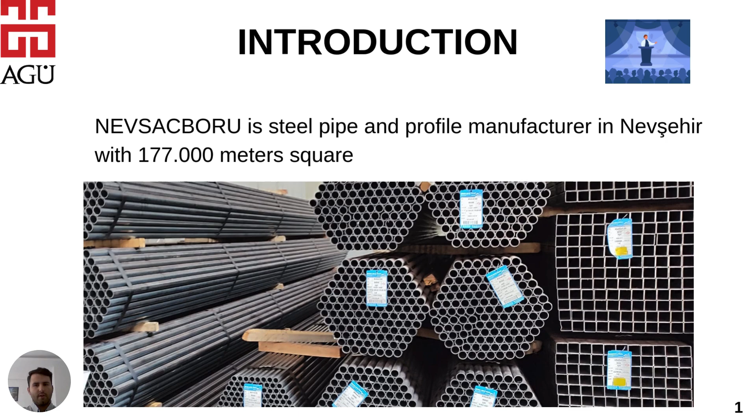Let me go through the system under consideration. Pipes are manufactured within some order, also a decision point. This decision point represents if the selected product will be pipe, steel pipe, or profile.

Supply of raw metal sheet begins the processes and continues to some cutting processes, also welding processes. Also, there is a cooling pool process. And the last process is the shipment, or sending products to the customers.

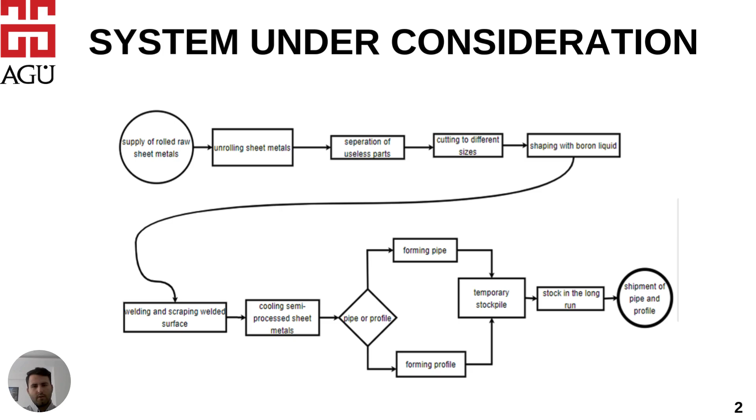The most important system processes are the unrolling and cutting machine, welding machine, and cooling pool processes. Especially the welding machine, because the welding machine represents the sizes of the steel pipes and profiles.

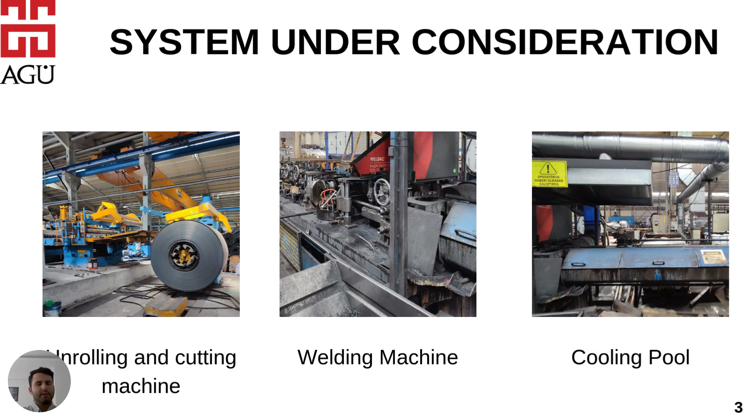Let me go through the methodology part. In methodology, I analyzed the problem in Nevsac Steel Company by drawing a fishbone diagram, considering measurement, people, and environment.

Most problems are coming from the hygiene, also some old gauge use. Also, there are some engineering issues.

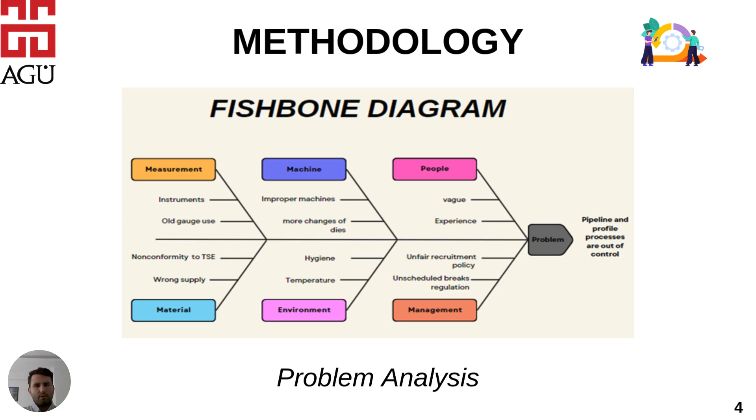These parts represent the old data of profile with size 30 by 30, and this data is related to the thickness of this profile. I have collected a sample size of 10 and number of samples was 25.

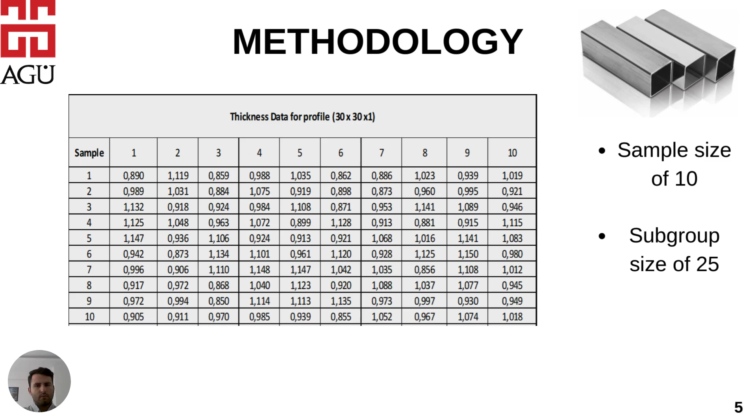Then statistically I illustrated the X-bar chart because there is a thickness measurement. X-bar chart and S chart would be available for it, due to the sample size and the measurement type, which is thickness. As you can see from this graph, there's one assignable cause, an upper control limit, as well as the upper specified limit.

The specified limit, by the way, also comes from the TSE, which is the Turkish standard. Also, there are more fluctuations, wave-like shapes, more and more.

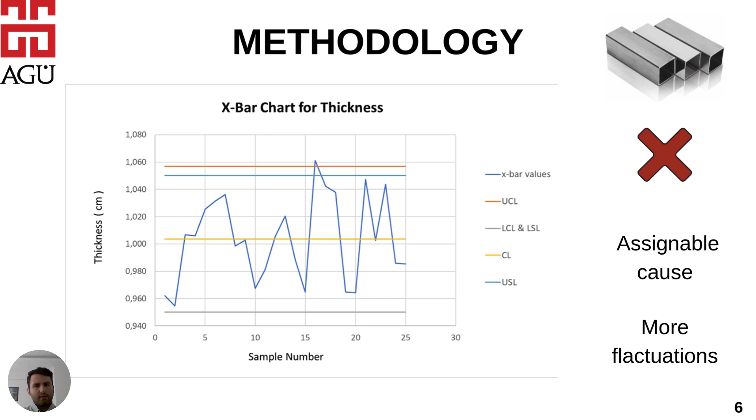Let me go through the S chart. In the S chart, there is no point out of the boundaries, the upper control limit as well as lower control limit. Deviations are too much, and downside deviations are much longer than the upper side deviations. Also, most deviations are at the 16th sample.

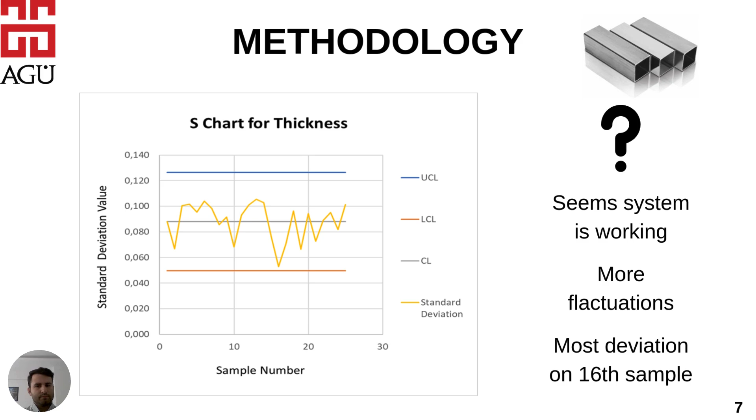How can I improve this system about the thickness? I suggested increased hygiene, new gauge order, and more maintenance for machines, especially the welding machine.

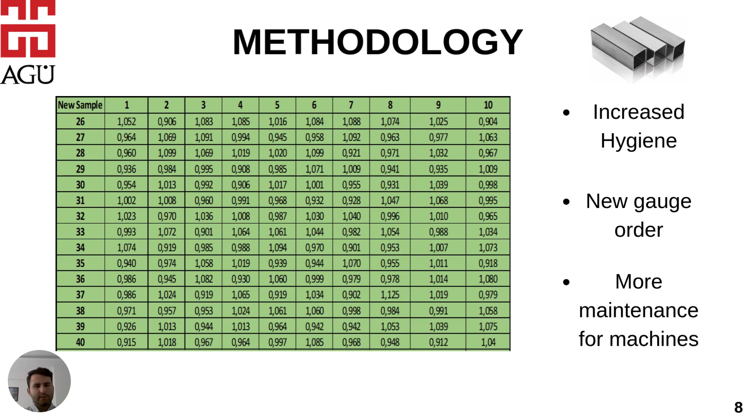For this new data, I took 15 samples in subgroups, and each subgroup contains a sample size of 10. When I increased the hygiene, new gauge order, and more maintenance for machines, the system will be improved. We'll see.

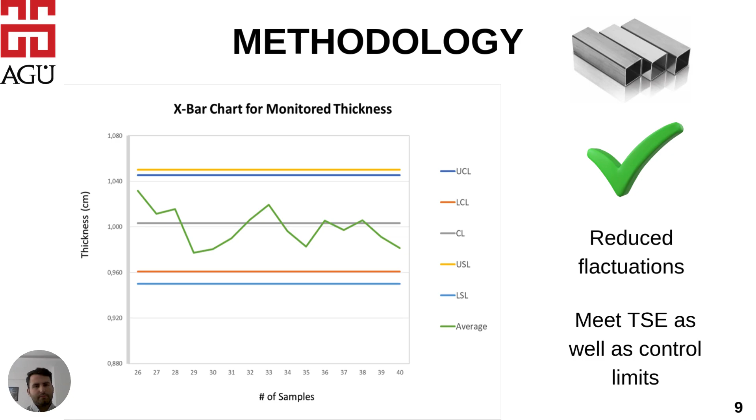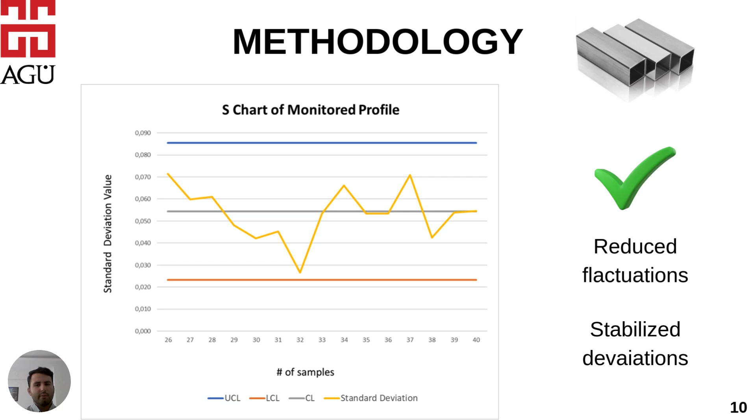Other than profiles, I will be talking about steel pipe with size 20 by 20.

I implemented the same methods like the predecessor one, which is profile. Still, this method is applicable for steel pipe as well. We can see from the data and the chart I will illustrate later.

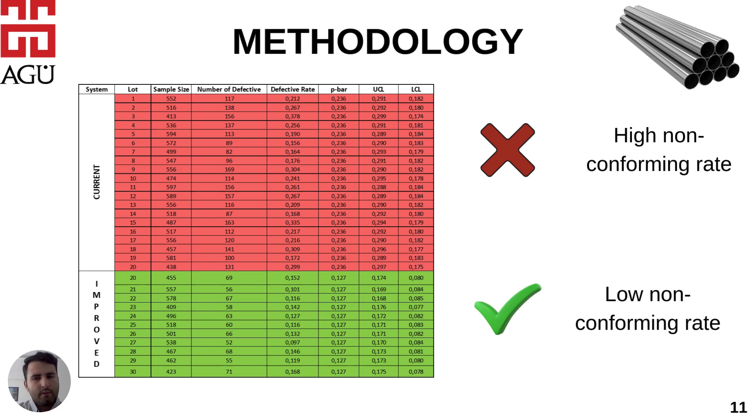After improving the system, the average of P, average of nonconformities, are reduced greatly. Also, the upper and lower control limits have reduced almost 50%.

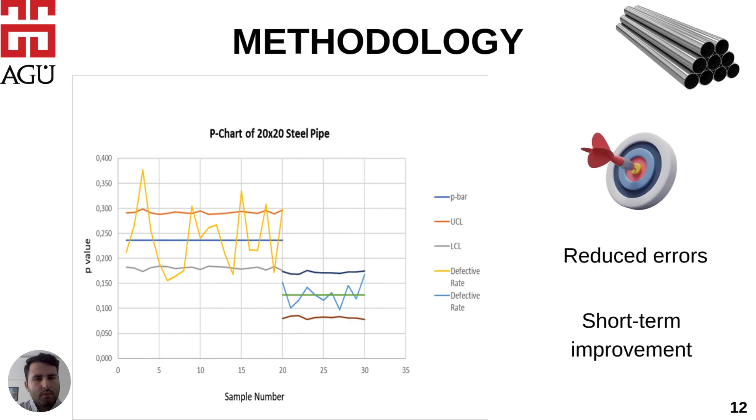As a conclusion, I analyzed the profile with size 30 by 30 and thickness 1 centimeter via X-bar and S chart, because of the sample size and available data.

For steel pipe, I got support from the mechanical engineers. They are also responsible for quality control in the company. Also, I suggested they observe the system over a long duration, because this is a short term solution.

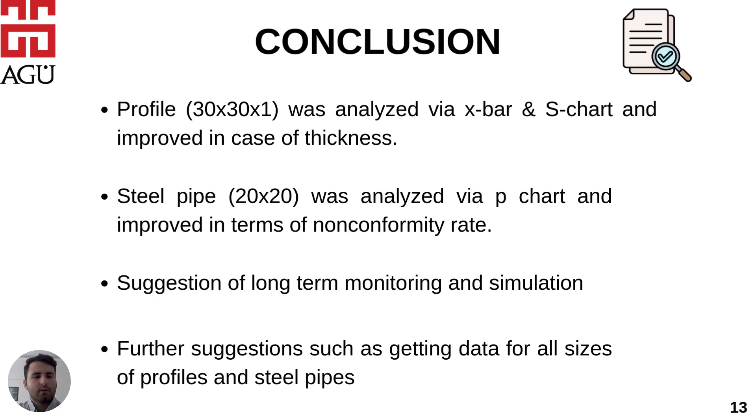We cannot say our solution will be okay for the long term. Also, I suggested they get data from the steel pipe related to their parameters, like radius or thickness, in a bit more detail.